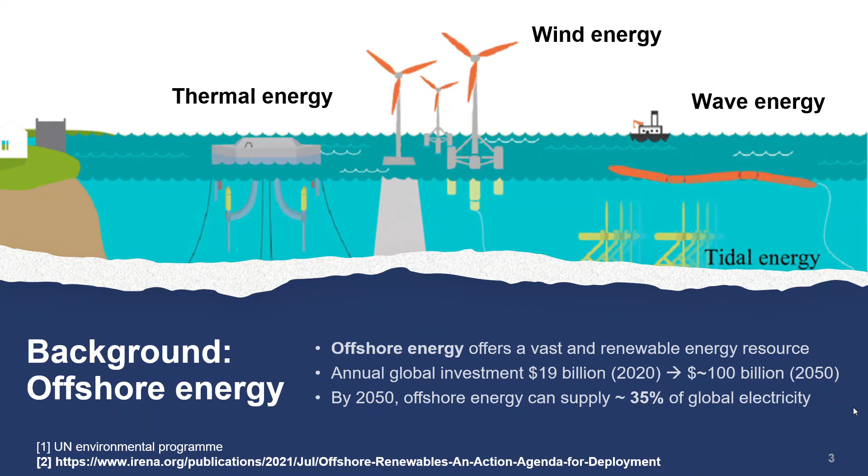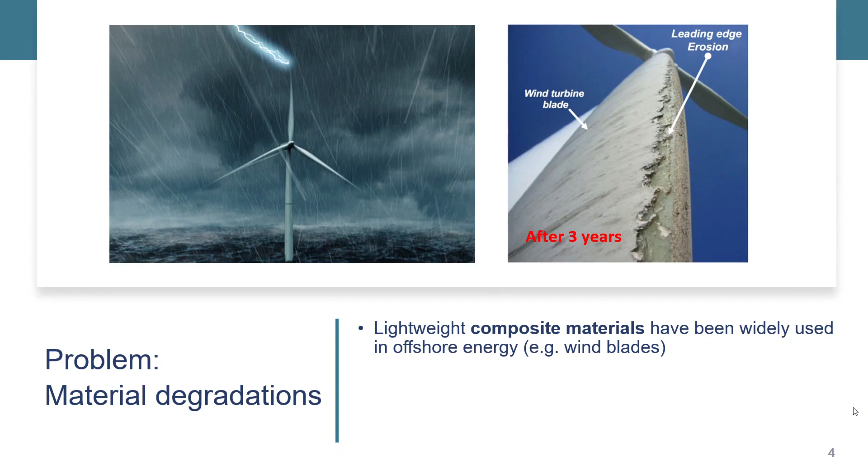However, there are some problems here. One of the main challenges is to develop resilient materials for offshore energy. As you know, lightweight composite materials have been widely used in wind turbine blades. In service, the turbine blade can experience very extreme weather conditions, including the combined moisture and temperature effects.

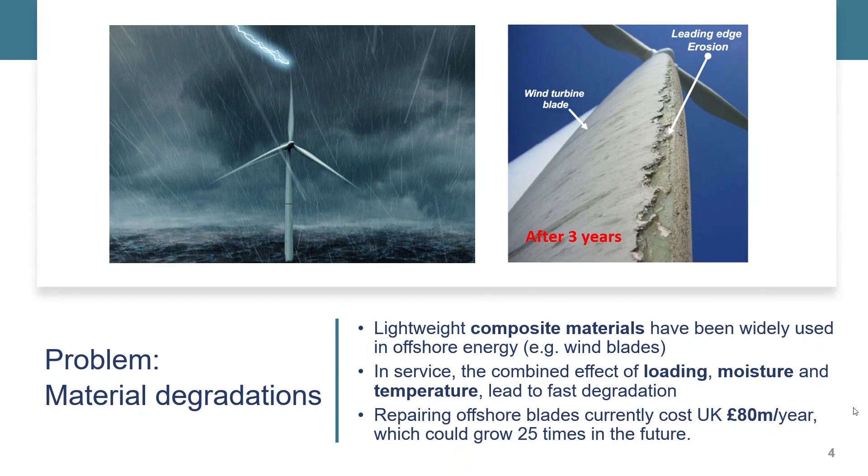This includes some extreme loading cases like high velocity impact of liquid, which can cause rapid wear of the wind turbine blades. Typically after 3 years, you need to send people to repair the wind turbine blade. Therefore, think about the cost. Repairing this is really expensive and it could grow from 80 million per year to 25 times larger. So therefore, it highlights the need to develop a fundamental understanding of this moisture-driven damage.

What are the possible mechanisms? From the experimental observations, we can hypothesize that moisture can cause the swelling of the matrix. It can also lead to matrix plasticization and hydrolysis. This could also introduce some fiber matrix debonding.

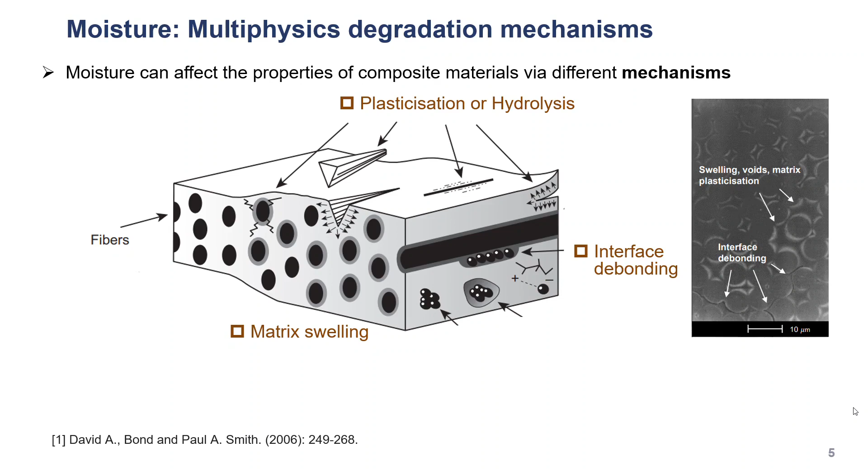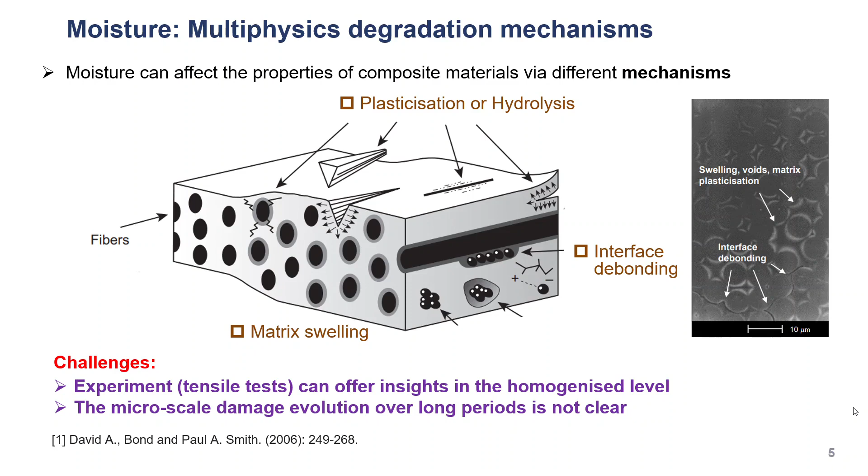The challenge here is current experimental results typically can only offer insight at the homogenized level. If we want to track the microscale damage initiation and evolution, this is super challenging. So how are we going to reveal that damage? This needs a very powerful combined experimental and computational model to help us understand the underlying mechanisms.

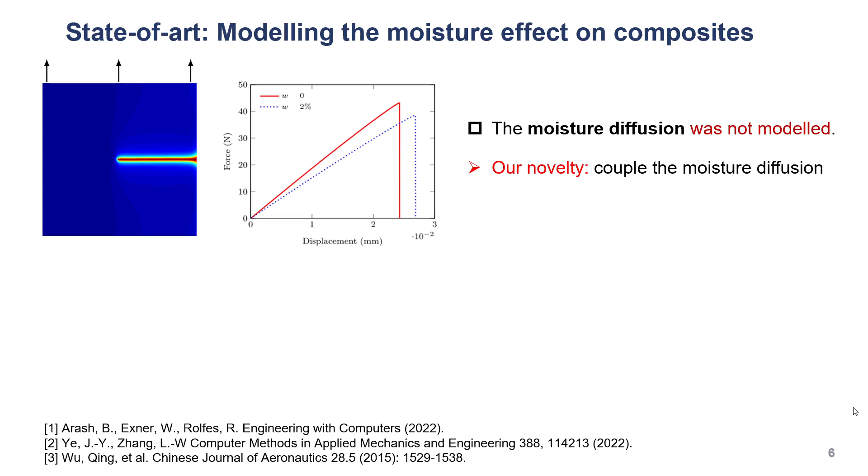The state-of-the-art modeling in these areas typically remains relatively unexplored. In the paper published by Arash in 2022, the moisture diffusion was not modeled. Instead, they assume uniform distribution on the material. We will try to present a multiphysics model to incorporate the moisture diffusion.

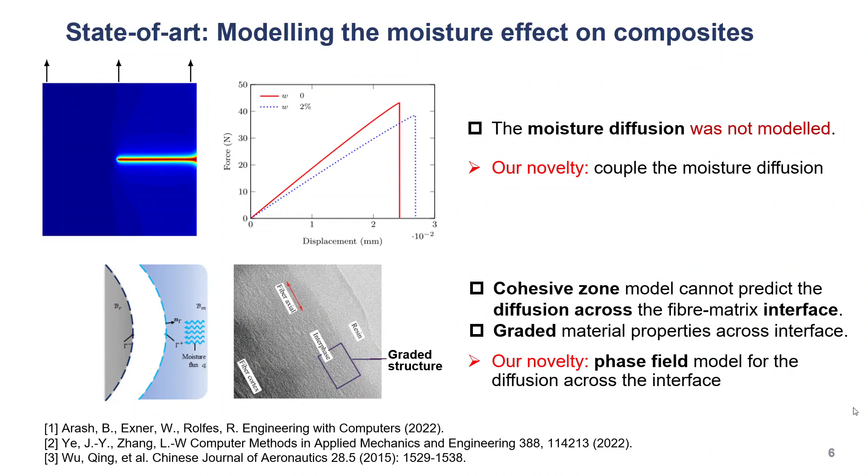In other recent papers, people have argued a cohesive zone model is really difficult to use to predict the diffusion across the fiber matrix interface because of its sharp interface nature. Also, people observe in experiments that the material property across the fiber interface and matrix has a transition. Therefore, our model tends to address these issues by using new phase field models. I will come to that later.

So how are we going to implement all these new elements? First of all, we want to present a fully coupled multiphysics phase field model to capture the interplay between the moisture, hygroscopic deformation and fracture. If the fracture can happen, the new open space can actually cause some influence on the diffusion process. It can promote diffusion as well.

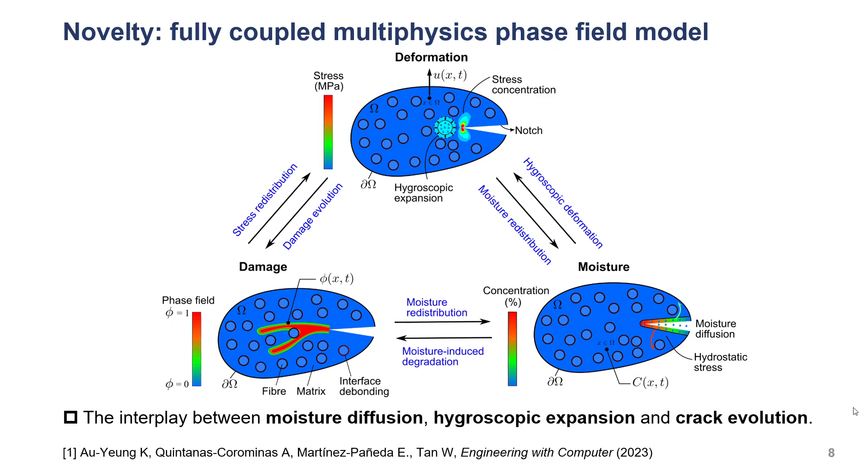So let's move to the details in the modeling part. For the moisture diffusion, it follows the second Fick's law. Basically, it describes the rate of change of concentration as proportional to the diffusion coefficient and the gradient of concentration. Then we can write the moisture flux. It describes a certain amount of moisture across the unit surface area.

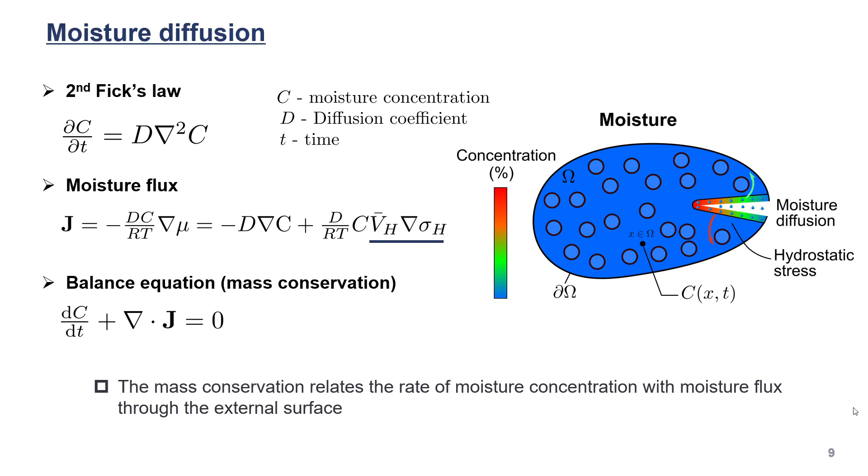Here, the new element we introduced is considering the hydrostatic stress, because this stress inside the material can influence the diffusion process. The higher the hydrostatic stress, the lower the amount of diffusion that can occur. Following that, we can derive the balance equation, which is based on the mass conservation law. This relates the rate of moisture change with the moisture flux through the external surface.

Move to the deformation problem. The deformation problem basically means if moisture is absorbed into the material, it can lead to swelling of the fiber and the matrix. We need to calculate this hygroscopic strain by considering the expansion coefficients times the change of concentration. In our Hooke's law, when we calculate the Cauchy stress, we need to exclude that hygroscopic strain.

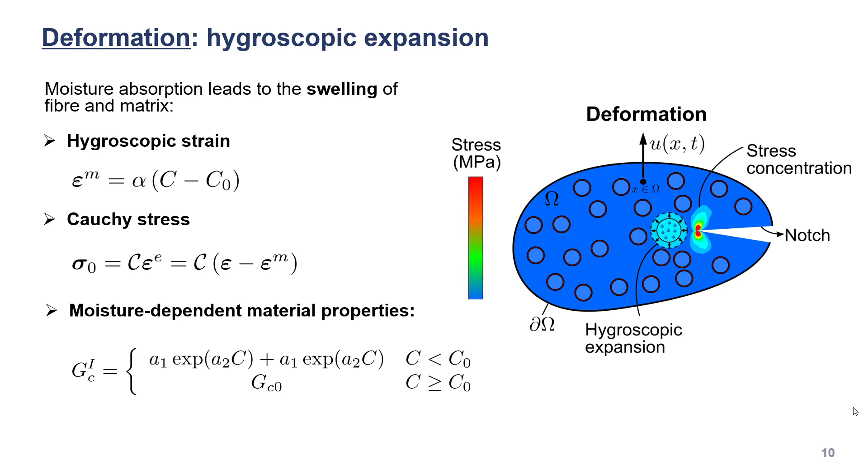In addition to that, we also need to consider the moisture influence on material properties, such as fracture toughness, Young's modulus and strength. Once that happens, we can model the internal stress inside the material. Then we can look at the fracture problems. We are using a phase field fracture model for this scenario.

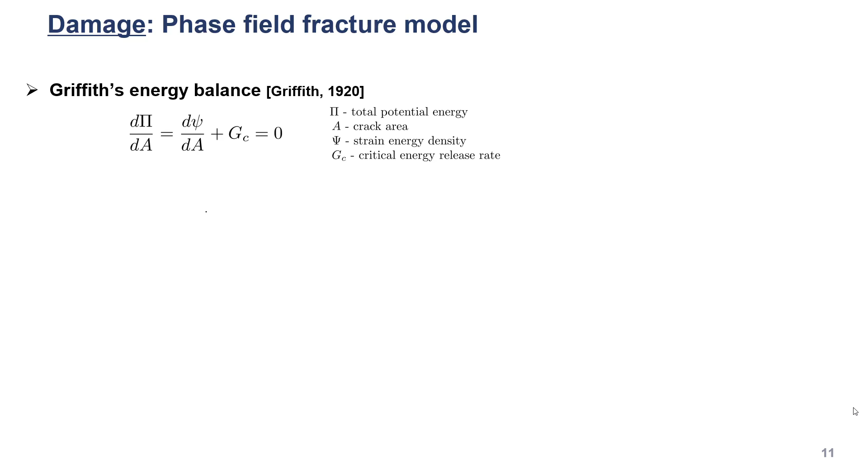Phase field model is basically a computational framework of the Griffith energy balance. One can write this equation into a variational form, basically integral expressions of the total potential energy. Minimizing this energy functional is actually very challenging because the sharp interface will introduce some numeric instabilities.

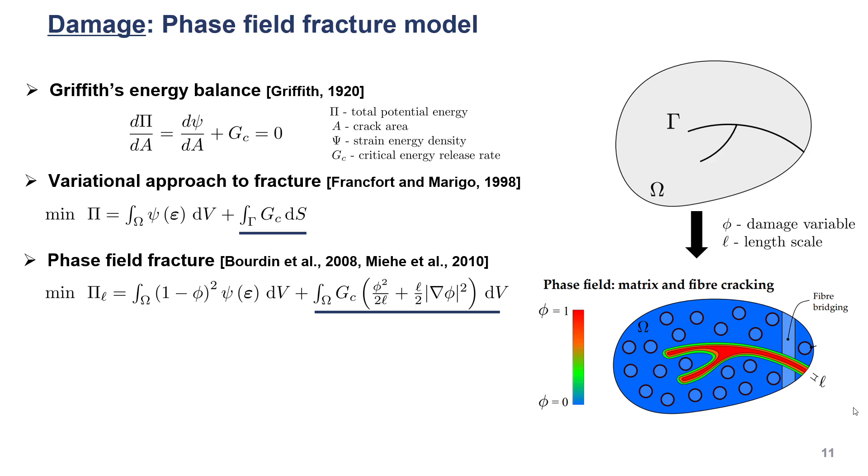However, we can use the phase field method, basically replacing the sharp interface with diffused regions. These diffused regions allow us to approximate the crack by a scalar field, like a damage variable from 0 to 1. Basically, the whole domain can be represented by this damage. That allows us to rewrite these equations in a volume integral, and we can solve them by solving the global minimization problem. By doing that, we can easily find the crack, its location, and the extent of the damage. This will further lead us to quantify the damage path and the following problems.

The last thing we want to consider is that a crack can actually increase the diffusion coefficient. When the crack happens, the open area can serve as a weak spot to promote moisture diffusion.

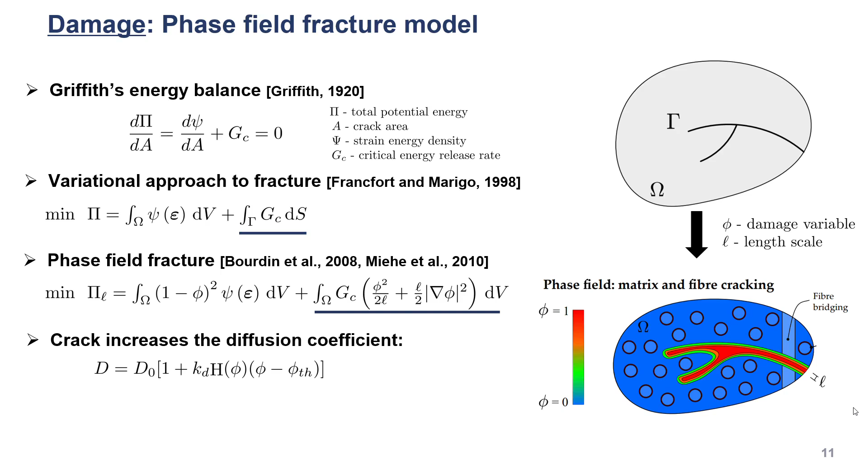One last puzzle we want to fill is the interface: how we're going to model the fiber matrix interface. Basically, the cohesive zone model assumes a sharp interface. In that sense, we want to model fractures at the interface and also model the moisture across the interface.

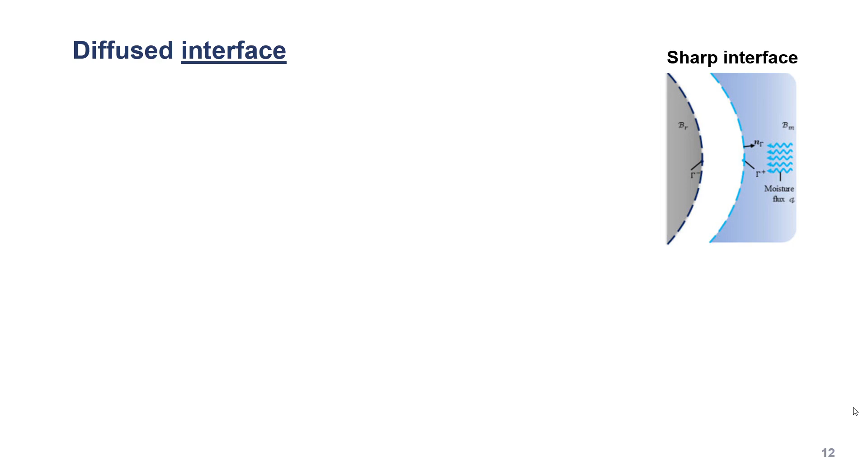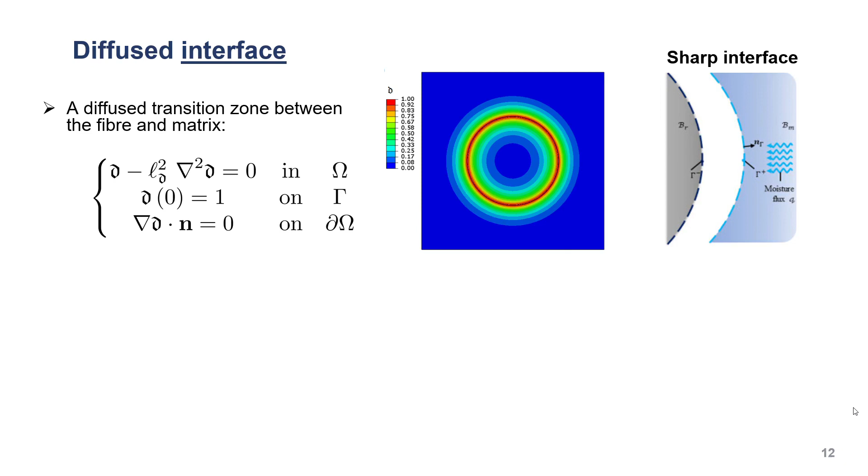To do that, we use the phase field method again. We approximate this interface by diffuse regions so we can easily couple the moisture transport problem. Secondly, we can also use this phase field method to capture the transition, or graded material properties, across the fiber matrix interface.

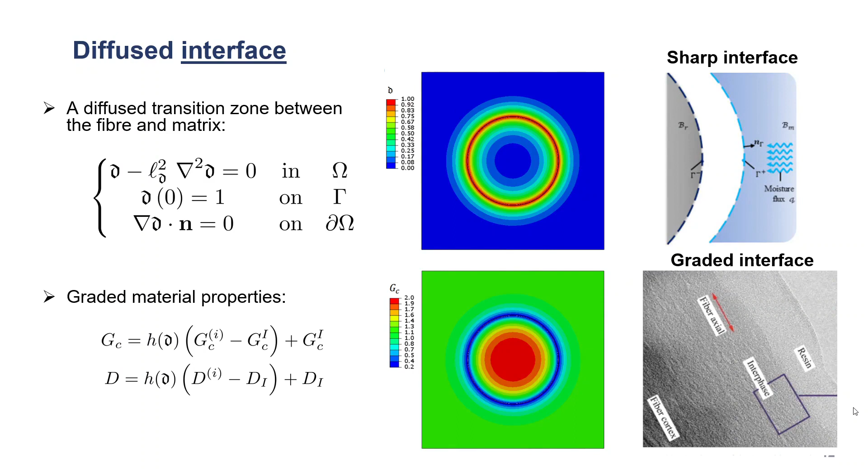By implementing all of these four elements, now we can try to solve these problems. Let's look at the results.

In experiments, people tend to age a sample in water for a few days, then take it out and do the mechanical loading. You can quantify the mode 1 and mode 2 fracture toughness. This graph plots the fracture toughness against the moisture content.

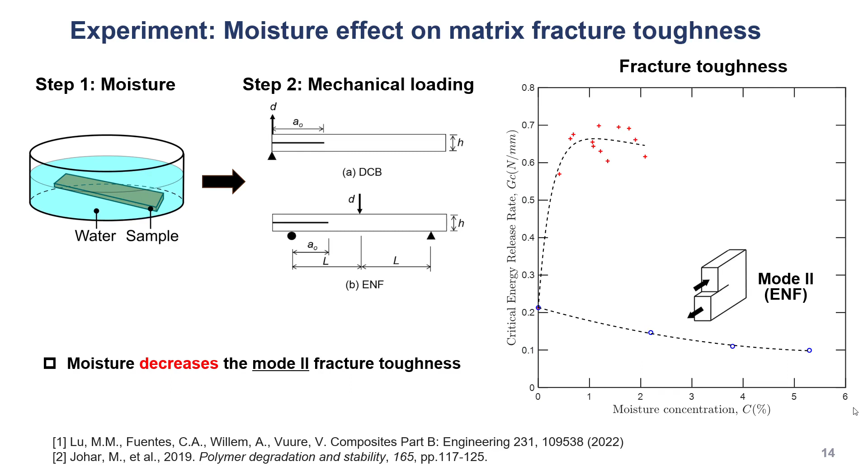Surprisingly, you can see moisture increased the mode 1 fracture toughness, but at the same time, moisture can decrease the mode 2 fracture toughness. So why is that? What are the mechanisms here?

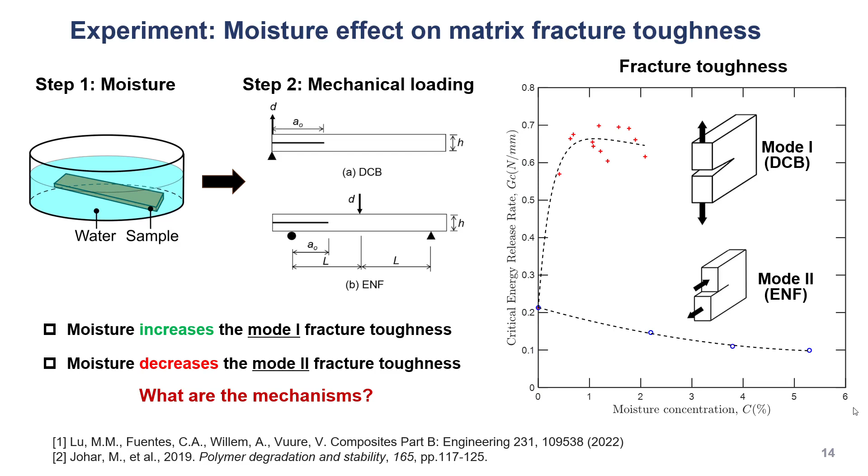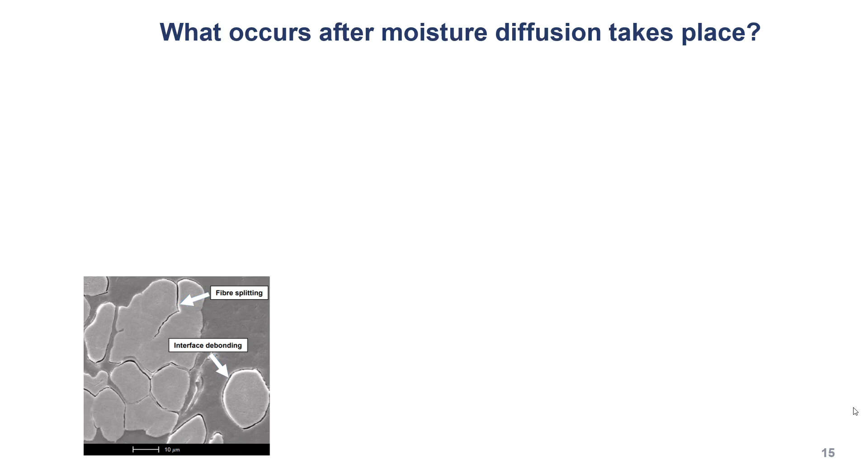The first question we want to ask: what occurs just after moisture diffusion takes place? If you look at the experimental results, you can see some fiber matrix debonding occurs, and this can be explained by this failure sequence.

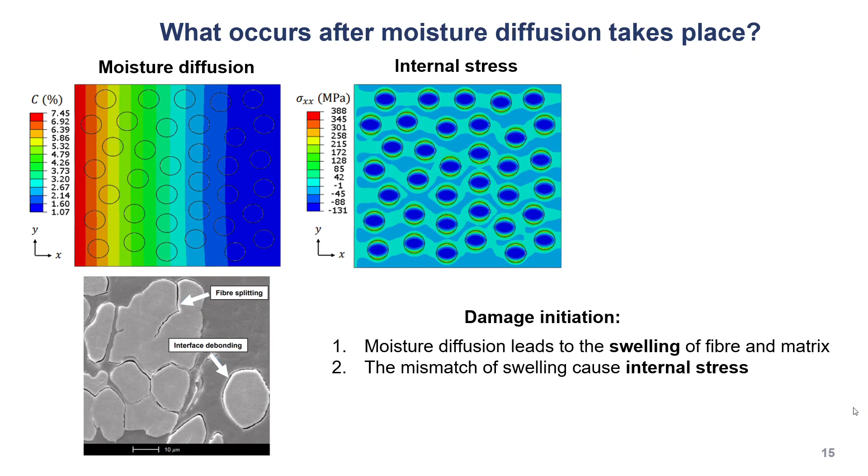You have the moisture diffusion, which can cause internal stress due to the mismatch between the fiber and matrix internal stress, or their coefficients of expansion. They can have different internal stress, and this can promote interface debonding. That's the first thing happening, before you even do mechanical characterization - it already triggers some internal interface debonding.

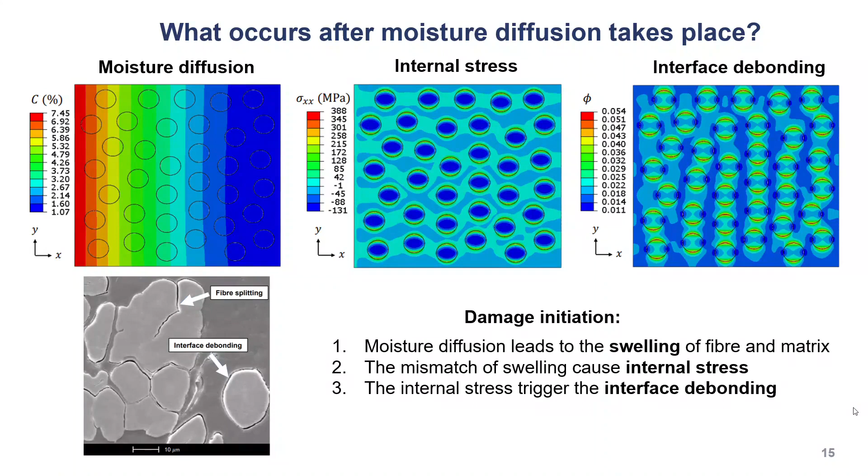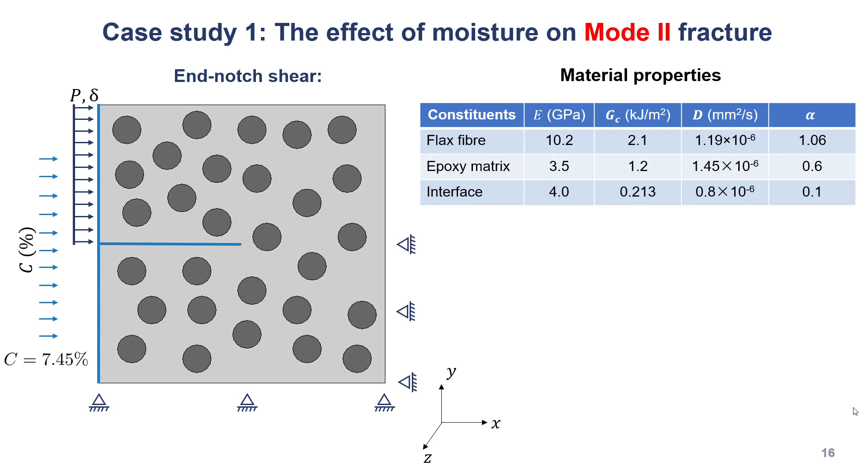Let's look at a case study: the effect of moisture on mode 2 fracture. We used the properties for flax fibers and epoxy matrix, and applied the boundary conditions in two steps. Step 1: apply the moisture diffusion boundaries at the left edge and notch areas. Step 2: apply the end notch shear loading.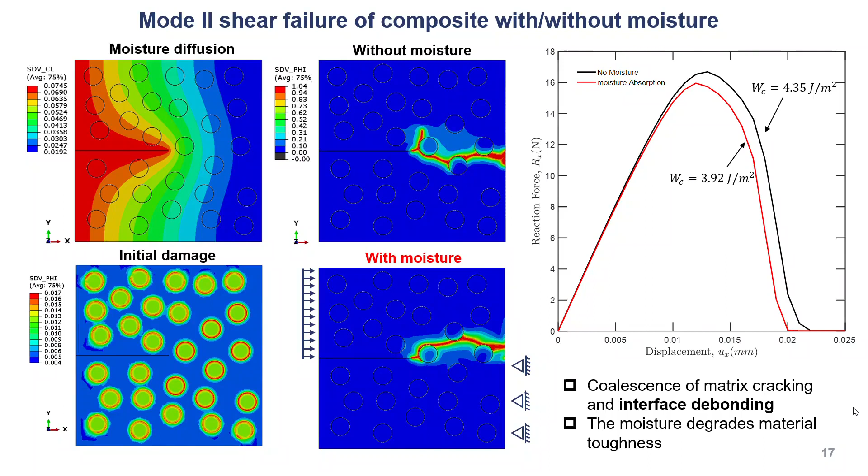So why does moisture degrade mode 2 fracture toughness? As I said, the dominant failure mode is interface debonding in this case. Because moisture can result in more interface debonding, this can trigger greater stress concentration and more shear cracks.

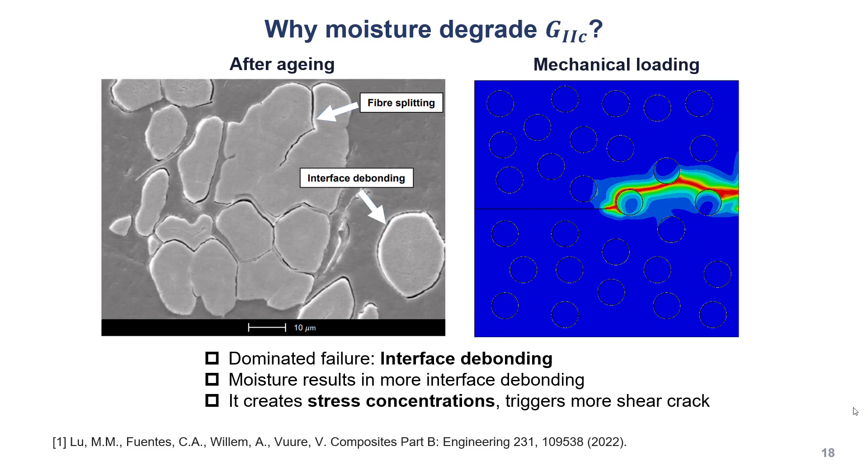Let's look at case study 2: how we model the influence of moisture on mode 1 crack growth. This is the virtual single notch bending test, where we want to predict the fracture toughness for the mode 1 case.

To model this at the microscale, we use an embedded zone. Ahead of the crack tip, we use a small window where we can place tiny fibers and matrix in a random manner, and then we can model their interface as well.

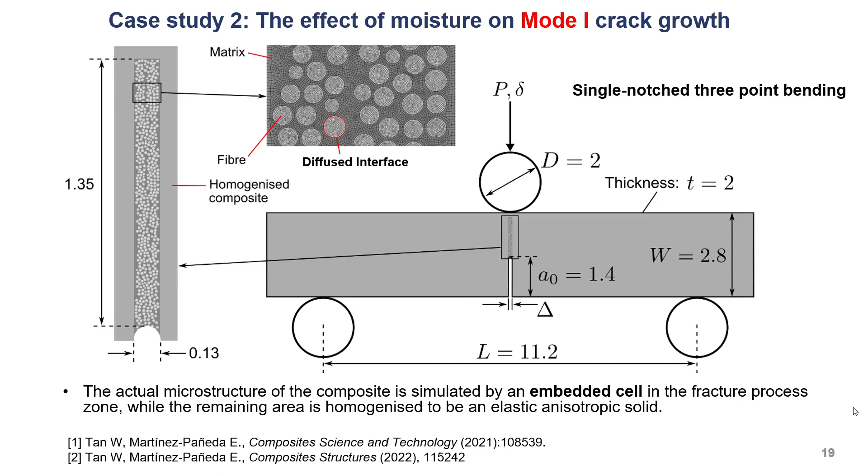This simplifies the problem because outside that embedded zone you have all homogenized properties. Then we can apply the moisture boundary and consider the diffuse interface, followed by the second step, mechanical loading.

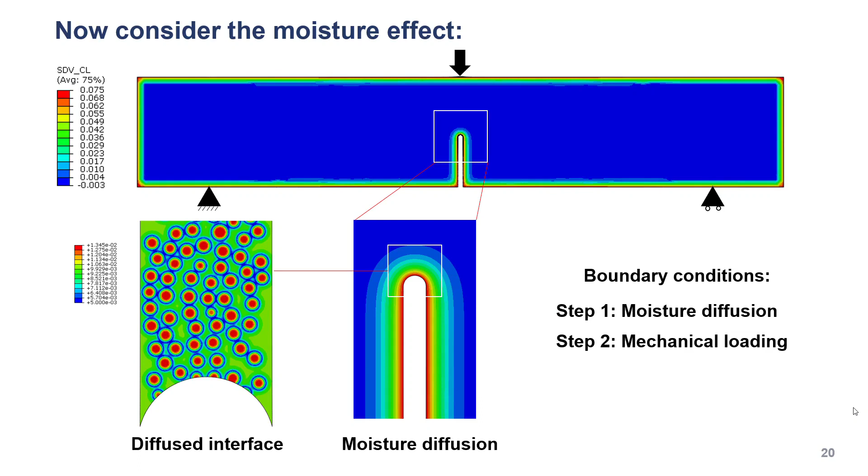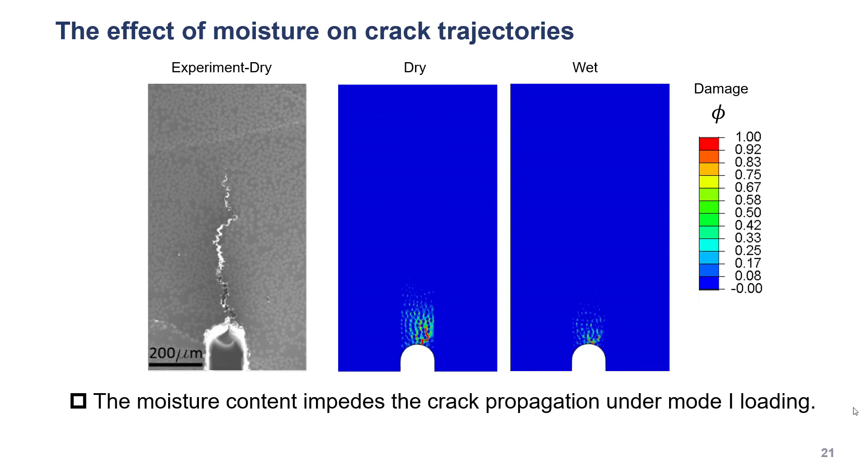Now this video shows the results. On the left, we have the experimental result where the crack grows. In the middle, this is the dry case where the crack grows through the fiber matrix microstructure. On the right, this is the wet sample, showing a very similar pattern.

If you look at them together, these are the final snapshots with the same amount of displacement applied. For the wet sample, you have smaller crack extensions. Looking at the R curve, the wet sample basically has higher fracture resistance. This does mean...

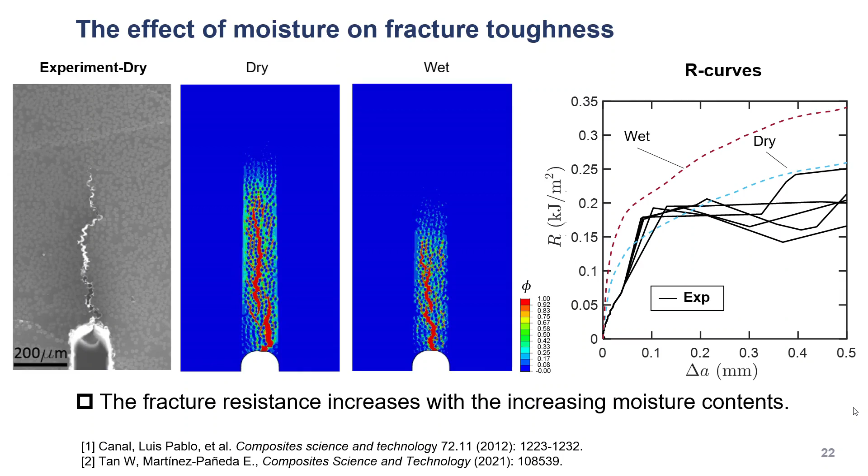...it helps us understand why moisture can promote mode 1 fracture toughness. From that simulation, we can see most of the failure happens in the matrix. The dominant failure is matrix cracking with some amount of interface debonding.

Because moisture can lead to matrix plasticization, this can introduce crack tip blunting and contribute to more energy dissipation. That's why it can promote the mode 1 fracture toughness.

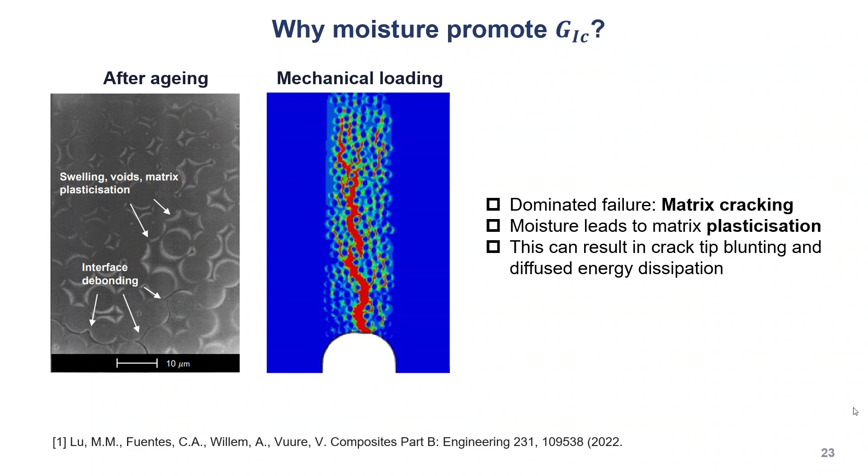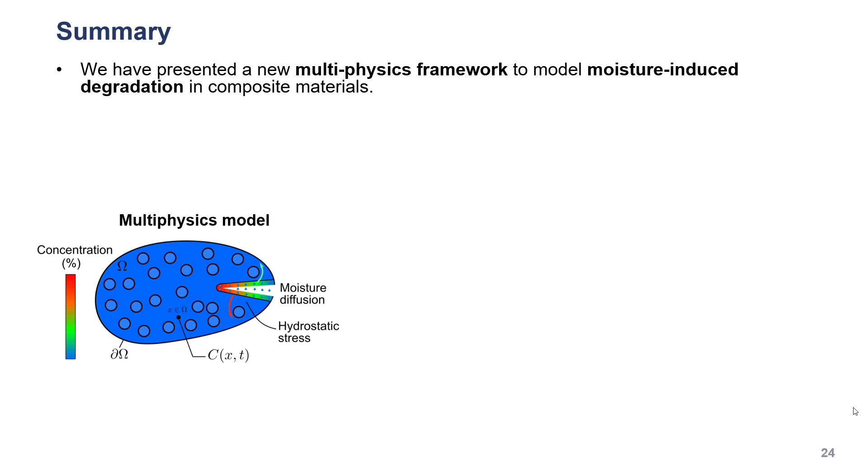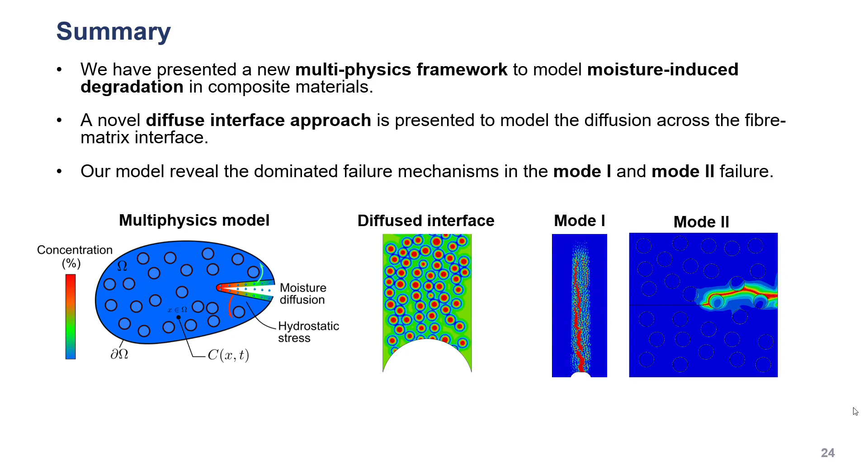In summary, we have presented a new multiphysics framework to model moisture-induced degradation in composite materials. A novel diffuse interface approach is presented to model diffusion across the fiber matrix interface. Our model revealed the dominant failure mechanisms in mode 1 and mode 2 failure.

Our future work will focus on conducting more micro-scale experiments under environmental conditions, and also extending the framework to model large-scale structures.